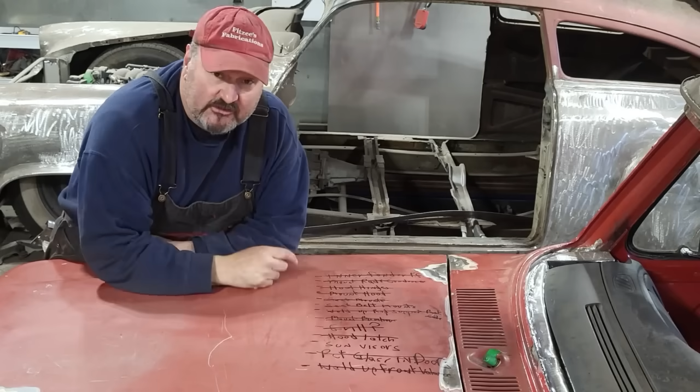Look, the to-do list is complete. Stick around.

Here we go. Project VIC100. Back on it again. I'm going to try to see what I can get done. I'd like to get this here clued up this week. And my little list here, a lot of it is pretty well straightforward and simple. I'm going to start working from the front to the back.

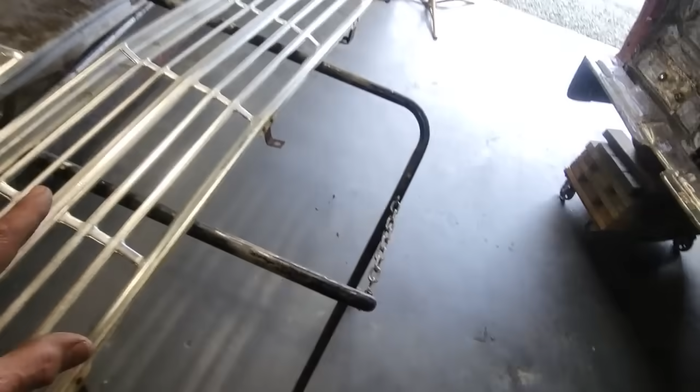I got the grill and the bumper here. I laid the grill up in place. I got to drill 2 holes right here and bolt them on. I'm not going to be concerned about that right now because I had it laid in place. It's all going to work. Everything's fine. There's no clearance issues with the grill that I can find. So I'm going to move on to getting this front bumper mounted.

I got to make up bumper brackets right here to come out, and I got to join into the frame rail here. Now, the problem I got is that this is why I was talking about body mounts and stuff like that. I can't mount them on the inside, and on the bottom I can't mount it because there is a cross member that goes across the bottom there and the rad support right here. So I can't hang off the front of it here anywhere, back to about here somewhere.

So I can only come down, and I got this sway bar to deal with on the bottom. So the bottom is a bit of a nuisance. I'm going to have to come off this side here and go down and go forward. That's what I'm going to have to do for bumper brackets. So I think I'm just going to come down here with steel, and then go forward and give me something for the bumper to mount to.

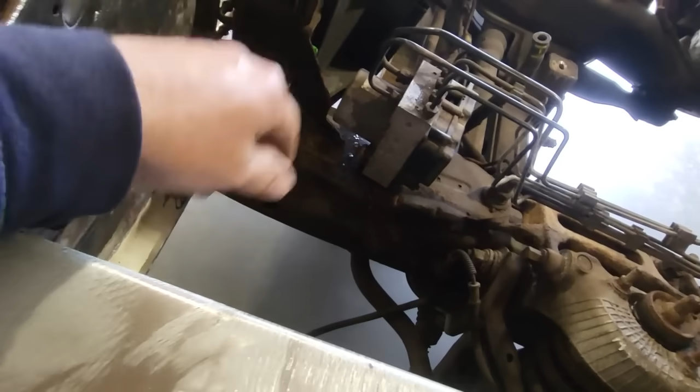I'm always looking for used steel around. I managed to find, I think they're 8-foot lengths possibly. There's a bunch of 2x2 right here that I picked up used. It's all brand new steel. It came from like a building supplies place that came with some brackets or something, and this steel was very clean. I like it.

So I'm going to take that there. I'm going to mount to the bumper. I'm going to double them up and make 4 inches out of them. I haven't got nothing here, and I'm not buying nothing for this. I have it here in the shop, so I'm going to use this here. I'm going to take a piece of that now and start taking some measurements to mount the bumper on the front of it.

And I'm going to build a plating system that will take in the factory bumper bolts right here. I'm just going to get a strip of steel that'll fit in here that this will bolt to. And I'm going to have it wide enough so I can just weld a 2x2 to it. And that'll be welded to the chassis rail. So it's pretty well straightforward and simple. I've been thinking about it all weekend, what way I was going to do it. I'd just as soon get it done.

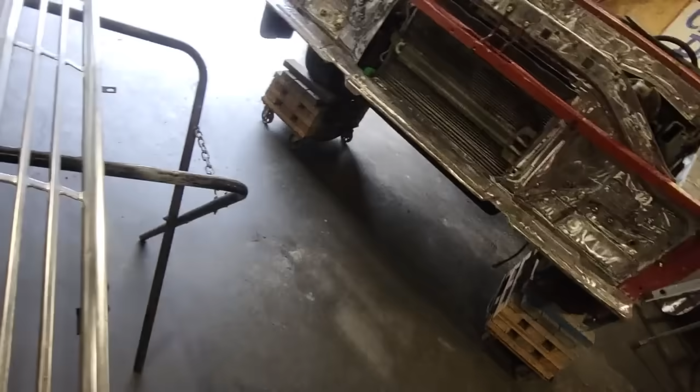And so the bumper, I got to figure out how wide it's going to come out. You can see the way the brace is there now. So the bumper brace is going to come out here somewhere on the outside of this. So I got to take some measurements now and figure out how wide this plating system is going to be, because it's going to bolt on here, but the chassis rail is going to be out about here somewhere. This is what I got to figure out. So I'll go get that all figured out now.

Been doing a lot of figuring out and trying to get a game plan on everything. This is what I've come up with. In here you can see I made this L bracket that's cut on a 45, and that comes out this way here to the front. I made 2 of them, one for this side, one for the other side. They will be welded on there.

I started thinking about individual bumper brackets coming out and tabbing off them, and I think the easiest thing for me to do is just to make a square box that'll go over here like a push bar, and then that'll go back and go over here.

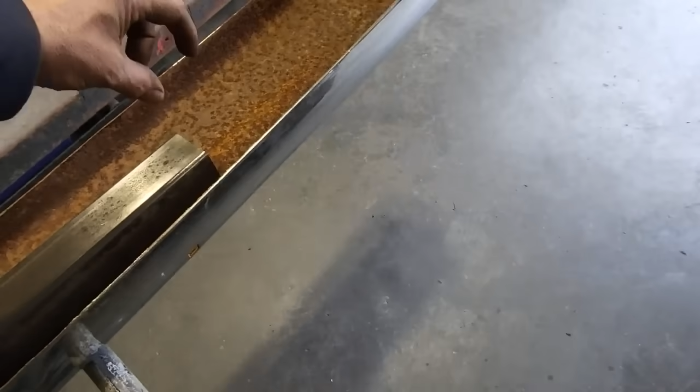That way, because the problem I got is the actual bumper bolts. To give you an example, right here, see there's the bumper bolt there. Well, this is about where this end of the pipe is going to be. This piece right here, this square stock piece, will be about right here somewhere. So I need to put tabs off of it to come over to this here.

Now, if I had this piece going across this way here, I can just weld onto this, come up, and tab to this here, and tab to that bottom there, and then I got spots where I can actually put the bumper on. And this here will go across the front of it like this. It just tidies everything up, keeps everything square. It's extra support, ties the entire front chassis rail together.

And so I just look at the whole point of simplicity of it, keeping everything square, because the frame rails are not exactly square going out to the front of it, but I got a measurement now from this back corner to the back corner on the other side, I got 42.5 inches. And if I just made this a square box, 42.5 inches, then I can move it back and forth to actually figure out my heights.

I'm going to cut, I think, another inch off of these, and that'll be my outside edge, because I don't need all this here. I got to have it so that I can actually tuck the bumper back as far as I can once I get it bolted on. Because once I get it figured out where this is on this, then I got to figure out this stuff here for the bumper bolts, right? So it's a lot to take in, lots of figuring to do.

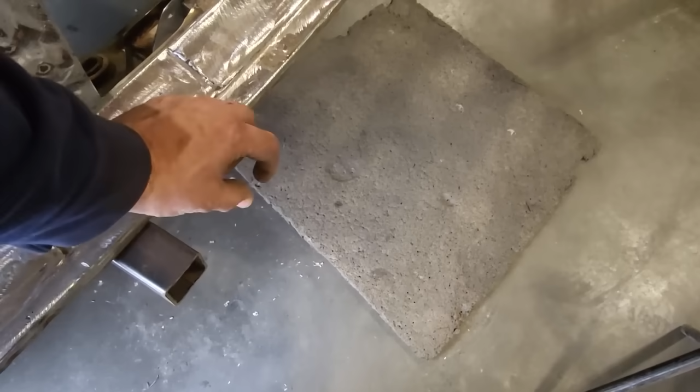Just a regular bumper bracket won't work. Like just tabbing this off of this here and coming down and running tabs off it. Because like I say, the bumper bolts are about right here somewhere. Then I would have to run a big old wide tab off it. And then trying to get this one the right height, trying to get that one the right height. I can do it all over there on the bench. Get this all square and flat, so when I put it up in place, this here will be level and straight. And then I just got to figure out where the tabs go.

So I'm not going to think too far ahead. I'm going to take this off now. I got 42.5 inches. I'm going to cut this on 45, cut this on 45 after I cut an inch off because it is too long. And then I'll take this piece here, cut it on 45, mark it out 42.5 inches. And then weld that onto that. So I just got this great big push bar in front of it then.

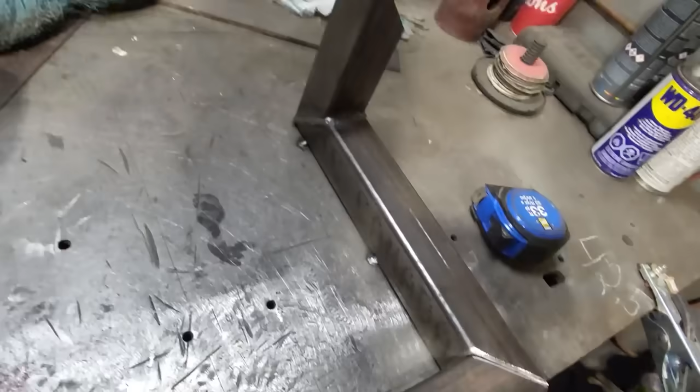I'm just blowing through this. I got everything cut on 45s. I got this measured up now to the outside edge here, 42.5 inches. And I shortened up this end here a small bit on the ends. I cut 2 inches off it because I figured this bar here is going to be out too far anyway. And this here could be moved forward some, so I took 2 full inches out on the inside here and cut that off, and then I cut this on a 45 to be the exact measurement from here to here, which is 42.5.

And then I squared up the bench here. I set them up, welded them on. I use the front of my bench as a straight edge. Then I measured from here to here on the inside edge. Done the same thing from here over to here, and I'm square. So I'm going to go ahead now and weld these on right here where it's 2. That way I'll get that all done.

But you can see the concept of what I'm after here now. I just want this to come down here and across and come up again, and that way I can just run a bumper bracket here and a bumper bracket here, and it'll bolt right on. Simple as that. Everything else I was thinking about, because this is the outside of the frame rail, I couldn't put it on the bottom of the frame rail right here, and I couldn't put it on the inside of the frame rail here.

It had to be on the outside. And in order for me to come over to the bumper bracket, this would have had to come down, come over, tip over, come over, this type of thing on a straight edge, and then trying to get both of them to be symmetrical. I think this here is just as simple and easy. To me, I want to make this quick and easy so that I can actually get everything put together on the front of it.

And this is just a crash bar. At the end of the day, it puts a bit of strength on the front of the truck and ties the nose of the frame rail back together again, because there was a cross member there, welded all together. Now it's all going to be joined again. It's just going to be the bumper bracket is all. Anyway, I'll go get that all welded up.

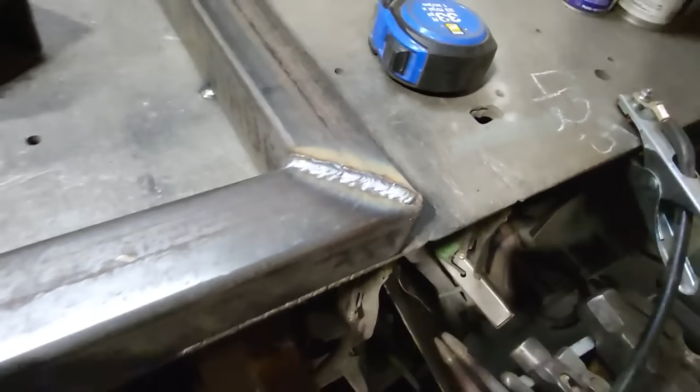I got the welders changed over. The VIC100 got 023 wire in it, and the VIC205 Pro got 035 wire in it. So now I got this machine hooked up here, and I'm just trying to get used to it again. I don't do a lot of heavy structural welding at times, and they're not half bad welds, just they're very high, and I don't like that. And oh, that's good enough for this old thing.

I gotta let this cool off now, cut it off. I just gotta weld the bottoms here and the bottom here, and then this piece here is ready to go over and start test fitting. I got to figure out where it sits in the bumper and go from there. So I got them all welded up and grinded up.

As they always say, if you can never be a good welder, be a good grinder. That's good enough. That's lots of penetration over there. I just didn't like how high the welds were going. If I had time, I should have set the welder up right, but no, that's solid. Now you can see here, there's the bumper bolt there. There's where the outside of the frame rails were, in reference to this.

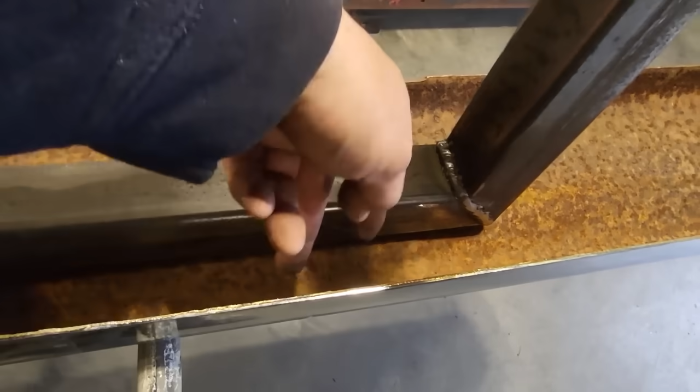All I'm going to do now is make up a tab that'll go down along here. That'll take in that bolt and that bolt there, and that will be welded to this here. And it'll just bolt down. It'll be a tab off there and a tab coming up here. I'm probably just going to make a strip to go right down over the whole works of it and just weld it from both sides. That way I'll have it done.

Same with over here. The only thing I got to find now is where this has got to be in terms of in and out and the height of it and stuff like that. So I'm going to clamp this in place now back on the truck to see where everything lies. Well, you talk about a few hours. I've been all afternoon now playing with this, trying to get this figured out.

I had the original chrome bumper. I was using that, and I found that I had to clamp everything on. I felt like the bumper was twisted or something, so I went and hauled out the steel bumper and started fitting that on there. It seems like that was fitting a little bit better, but I will be putting a chrome one on it. All I'm after is trying to find these locations here where I can actually put the bumper bolt plates on and get them all set up. Trying to figure things out.

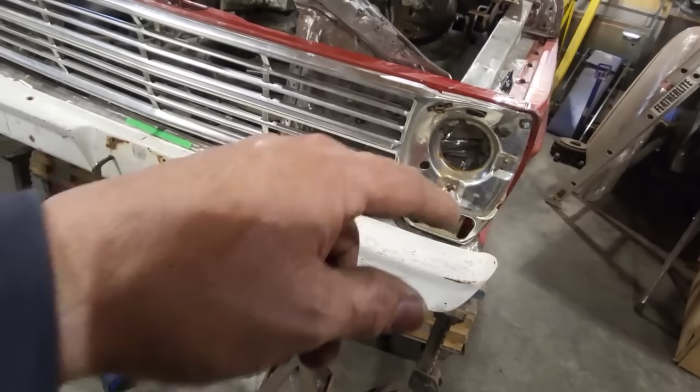I had to put the grill in it to get a visual on everything, to find out the distance here, how close I can tuck the bumper back. I've noticed some that are stuck off and some are right low and stuff like that, but I like to have this level with the bottom of the grill here and have it back as tight as I can get it, just a little small bit of leeway in between here.

It's still not the same left to right, because right here in the middle, the easiest way to describe it, the license plate bracket is curved like this. That's the easiest way to describe that. And I got that square stock running across the front. So when you're trying to clamp to it, whatever side you clamp to first, she'll pull that side in. And then you clamp the other side and it'll just bring it in, but it'll still stick off a small bit. This is what's going on here. Right, still stuck off a small bit here and a small bit there.

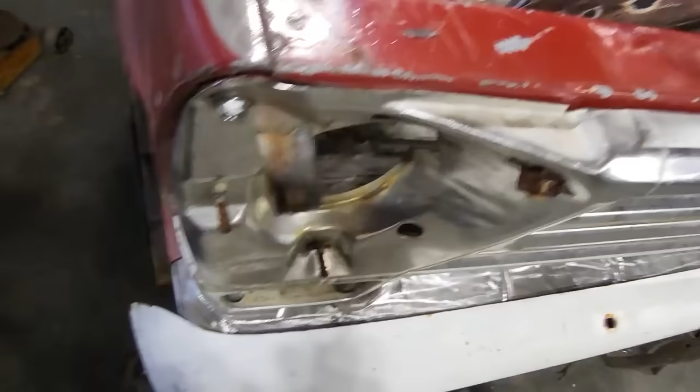Once I get the brackets figured out where they're going to go, I'm going to rig them up so that they're going to pull in tight. And it'll be touching along here on the bumper, and it'll be pulling tight in here. Trying to get the distance here figured out. Then trying to get these to look right. See here now we got this bracket. You see this hole above it? That's symmetrical left and right. It's in the same location.

And I was trying to get this section here to line up on both sides. And for the longest while, I had this one all the way forward, ahead of this line, and on the other side it was behind the line. I couldn't figure out what was going on. And it's because of the twist in the bumper. You're figuring things out as you go along, see? And I got this jury-rigged up enough now that I got an idea of what's going on. And I'm happy where it's to.

And I got this bracket put on the same place on this side over here so I can weld them on. I got spacer blocks put underneath the rad support. Looks like probably a 3/4 inch or ½ inch piece of board. And I got it clamped down with a C-clamp there on both sides. That's what's giving it the height. So when I take the blocks of wood out, there'll be a space underneath the rad support. Yeah, it's tricky, I can tell you.

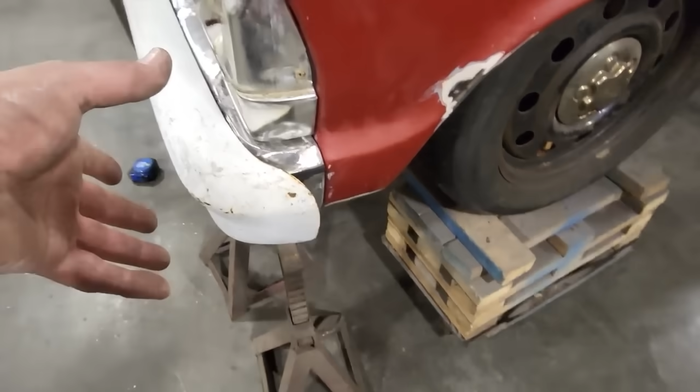I'm beat out at it here now, just trying to figure out, like, I'm still not happy with the way the bumper sits. I'd like to have the bumper turned a little tiny bit more like that. And I think all I'm going to do there is when I put the bracket on here, I'm going to put a spacer on the bottom bolt when I go to weld it on. So when I bolt it all together and weld it in place, right here there'll be a gap on the actual bumper bracket, so that when I take the washer out and tighten it up, it'll turn the bottom of the bumper in. That's the game plan that I got anyway.

Because over here, same thing, right? Just seems like it's not half bad. It's straight up and down. I've seen these bumpers where this section right here has been twisted out this way, right? So that's not half bad there. It's an unusual shaped bumper. Like I talked about before, the bumper gets narrow in the middle and gets wide again. That's just the nature of the beast on these.

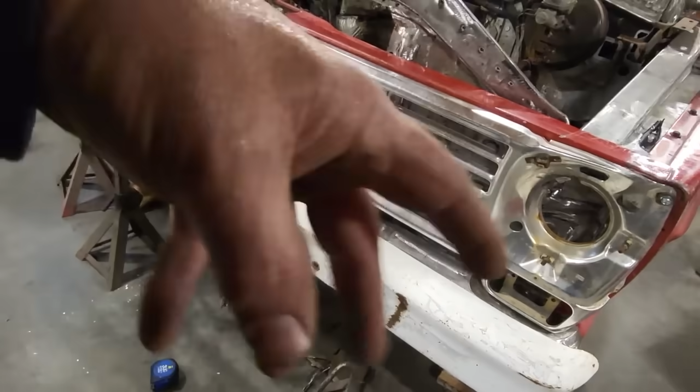And it overlaps the center valance. So I wanted to overlap as much of this line as I possibly could. You can see this line here goes along the front, and then it just disappears. Now that line up here is right here underneath the bumper. That's how much the bumper overlaps on that end and in the middle. It's wild. Like, what was Ford thinking? You would think this would have a bit of a curvature to it. And I've seen guys take bumpers and put curves and everything on them. I'm not going to touch that chrome bumper. That bumper's going on like it is. I'm just over-analyzing every little detail.

Right here, I got a hole. I got to drill. There's a bracket in here. You see the little bracket? Look down there. Yeah, you can see the little bracket right there. You can barely get my finger at it. But I got to drill a hole in the rad support there, and there's another one over here. There's one in the middle right here that I'm possibly going to have to lengthen, because that goes down.

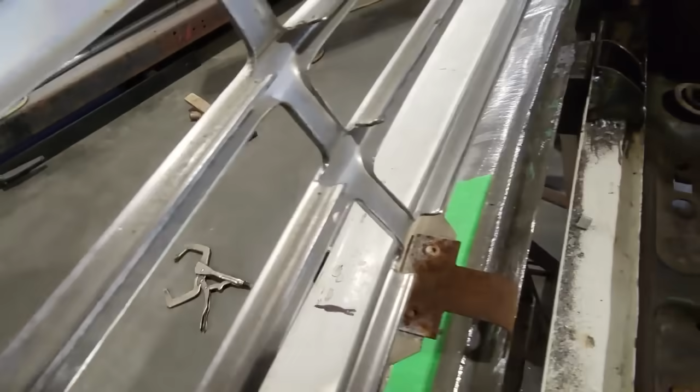You can see it right there. And I think I'm going to lengthen that and have that so it bolts on in the middle right here, in this section right here. This will come in and go down and bolt on here. That's what I think I'm going to do there. And that's all the original brackets on the rad, on the actual grill.

But yeah, I got to figure it out. I got to go make up these brackets here now. Get them figured out, see if I can dig out some 4 bumper bolts. I have a bin of bumper bolts there. It's just a matter of finding nuts and everything for them, find the ones that fit them. So I'll go work on that now and see if I can figure out something for brackets.

I throw nothing out. Oh, carriage bolt style unit. These are the bumper ones here. I found 4 of them there, 4 or 5 of them. There's a few more there. I'd like to have a few long ones if I can get them. Yeah, they're too long, them ones there are. So I'll figure out a few bolts and get some nuts for them.

So here's how the bracket and everything looks on the front of it now. It is all fitting. I haven't got it welded on yet. I'm going to wait till I got the bumper actually mounted. So if I got to tweak it to get the bumper to fit proper, I will.

Over here now, I'm going to use the steel bumper, or the painted bumper. All I'm going to do is I get 2 strips now. They're going to come down here, come up here, and cut 2 holes in them that I can actually put the bolts through, and then I can tighten up the nut on the back side, and then this plate here will be welded right here, onto this here. So this will have a tab coming up here, and a tab going down on the bottom side of it there. That's the whole process.

So over here now, what I got done is I got myself some bolts. Hopefully they're going to be long enough. This is all I can find. I have to run out and get more if I got to. But I got this 3/16 plate here. I'm going to measure up how much I need, cut it off, and then I'm going to start bending it up to fit. I'm going to try to see if I can bend it in the vise.

Hopefully I can, because there's only strips. If not, I'll have to split it and thin it and bend it, and then I'll weld it up again and dress it that way. But I'm going to try to see if I can just manually bend it first, because I got to put a 90 degree on one end of it, and then I got to put a hole in the end of it here and another one down here, so I can actually bolt it on to the bumper itself. So I'll go ahead now and get these cut out and see what I can do about bending them up.

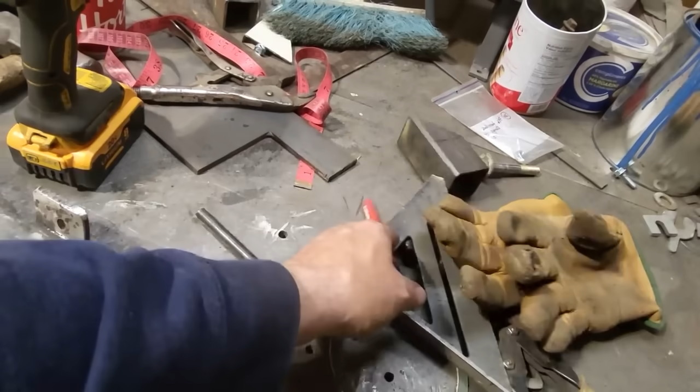Well, that wasn't half bad. This is what I come up with. All I did is I cut up some lengths of that 3/16. I just clamped it in the vise like so, and struck it with a hammer and bent it over. That's it. I went over and test fitted it, marked the back side of it, came over here and just drilled it out with a couple of drill bits. There you go. Got a couple of bumper brackets, rounded off the edges on them a bit. We'll go over now and bolt them on. It's as simple as that.

Got 2 of them bolted on. I'm going to go over now, position this on the front of it and clamp it onto that spot there and get everything lined up where I'm happy with it, so I can get that welded on right there. So I got it all welded on. There we go. We got bumpers on it. I got to take this off now because I only got the bottom lip of it welded, and I got to weld the top of the bracket and everything under. But I went ahead then, came over here and put some bubble gum on over here.

And got that so it's permanently mounted part of the truck. I want to tidy it up and run beads on this when I haul all the front off it. But I'd like to get this bumper bracket finished up because the top of it is kind of tipped back a small bit. So I'm going to have to probably put a small sliver of steel or something in there to weld it up to keep it in the position that it's in now. But that's it. She has a bumper.

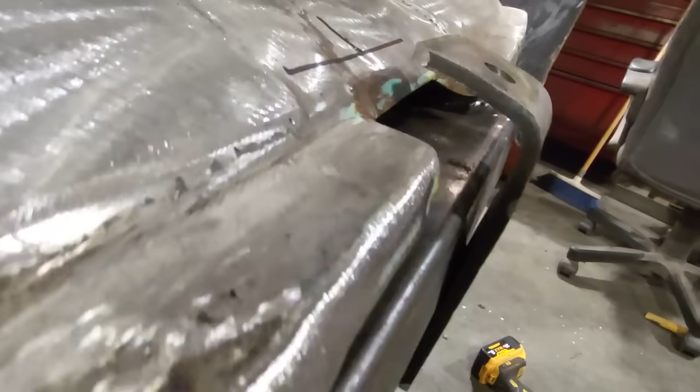So I'm going to go ahead now and haul that bumper off so you can see how it all goes together. So here's what it looks like. There's a bit of an angle there, you can see. I'm gonna have to fill that up with something. Over here, the same thing. I don't want to disturb them there, so I'm gonna weld them up now like they are. I'll probably get something put in here later on.

This was a nightmare. I had to cannibalize an old wrench in order to get this bolt out. I marked these here because I want to see how much of this I can actually move back to make room, but that's not the problem. The problem is this section right here. I might notch this or something so I can get in there. It is hard to get a bolt in here, the way that's done. But that's it. I got it done.

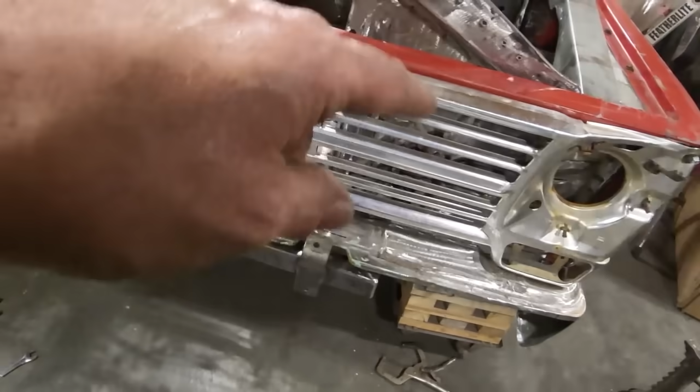I'm going to go ahead and get 2 of them welded up. Well, I got most of it welded up. Sides there. Got them all welded up now. I'm going to weld the inside in there when I get the rad support and everything out of it. Same with in around there, the back side. I'm happy with everything that's there now. So I'm just going to throw the chrome bumper on there and see what it looks like.

Well, there is a slight difference with them. All I got done is the 2 bottom bolts put in. I just got the 2 top ones laid in place, so it's got to be pulled down a small bit and tightened up over here. But there is a bit of a difference right here from the other bumper. You see it here and here. This is what I was after, this distance here.

This side here seems to be tweaked out a small bit. You can see there's a kink in the bumper there. So I'll have to massage that back into place on that end because it only hangs from here. So this side has to be pulled in. I'd say if you give that a few smacks with a block of wood and a hammer, you'll get that moved back. But yeah, I got the bling on her now. Look, all the chrome on the front of her. Woo-hoo. She's coming together. That's another one off the list.

I got to finish up some welding on it, but I'm going to leave that alone. I'm going to consider the actual bumper mounted. I just got to finish it up. I had to put the headlight pods on it just to get the full effect of it. Yeah. Another piece of the puzzle done. Now, a buddy of mine called me today. He's going to pop out tomorrow, and we're going to work on getting this hood put on. And that'll be all the front buttoned up then.

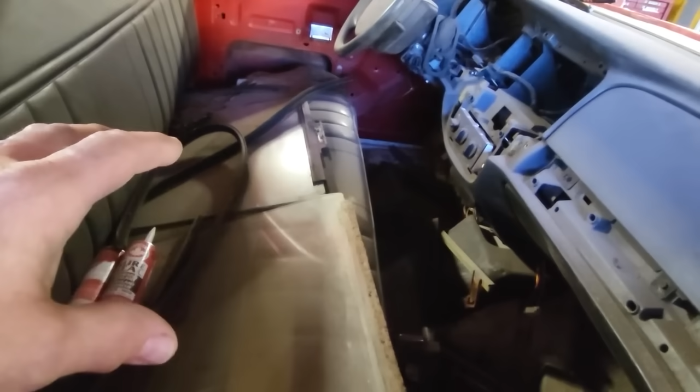What I'm going to move on to now is I got to do all the interior stuff. But before I do the interior stuff, I got to look after all this glass. Put all this back in the door and get all this back to normal again. And some of these doors, the bottom of the glass needs work done on them. I need to make up new runners or whatever for them. So what I'm going to do here now is take all this stuff out and set it up and start doing repairs so I can put this door back together.

So here's what we got. This is the mess I'm up against here. I got this piece here, this channel, and it is literally gone. This fits over the sleeve here, which slides over onto that there. What I need to do is make this piece here to replace this piece. I have this one here to go by. So I'm going to use this one as my template, because this will be the mirror image of this one. So all my measurements from this end will go from this end here, and so on. I need to do that repair there.

Up here I got the vent window section. This has a pin right here that welds onto here. That used to be the adjusting part of it and it's let go. So I got to weld that on. I may have to pull the glass out of this here in order to do that repair. But for now, I'm going to concentrate on getting this door glass done, because the vent window on the passenger side is good. So I can actually do this one here and put it together.

It's kind of strange because this window is good, but that vent window belongs to this window. And the vent window that belongs to this window is perfect. So I'm going to go ahead now and dream up something for this. I have an idea, old scrap steel I got here, that could possibly fix this. If you remember all that white sheeting that I had, there was rolled edges on it.

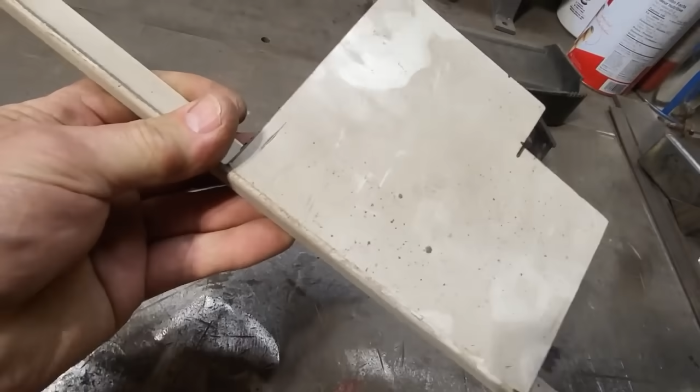The problem I'm having is finding a complete section that I can get both sides of this channel out of. I'm going to measure it up to see if it'll work or not, because I do have an abundance of this here that I can possibly build with. I don't think I got any there that's the full length. I'd like to use this wide section here. That one's too narrow. This one here I have roughly about this much of, and this much of this one here. So I might be able to make one from them two pieces here.

I can simply just take a piece like this and weld an edge back on it again. But I'm trying to make this so that I can actually build it and not have to worry about sides, because I think this here should work. So I'm going to go now and see what I can clean up here, see if I can get a measurement of how much I actually need, and start making the piece. Well, I did some more digging and I found this piece.

So this here should do for what I need it for. The measurement here almost seems identical on the bottom side here as the width that I need. This is the width that I need here, and that there seems pretty well to be the same as that. I kind of looked into this. If you look at the two of them there, seems to be quite the same. So I'm going to measure it off as 18 inches. I'm going to cut it off, trim it off, and start figuring out how I'm going to attach it.

So here's what I come up with. Nothing fancy about that. I had to close it up a small bit. I cleaned up the actual runner and I clamped it in place. Came over here using this one here as a guide, because it got to be backwards. But what I've noticed is that this is in the center of the actual thing. So this actual piece would fit on the left or the right. It doesn't matter. You just got to flip it around.

Like if you wanted to take this glass here, if you only had a passenger side door glass, all you got to do is pop this off, turn it around, put it back on the window again. You got driver's side door glass. That's the way they work. It's pretty neat. But I got this set up here now. This was only welded on, a couple of spot welds across here and a couple of spot welds across here. So I'm going to repeat the process, but I'm just going to weld it on the side here.

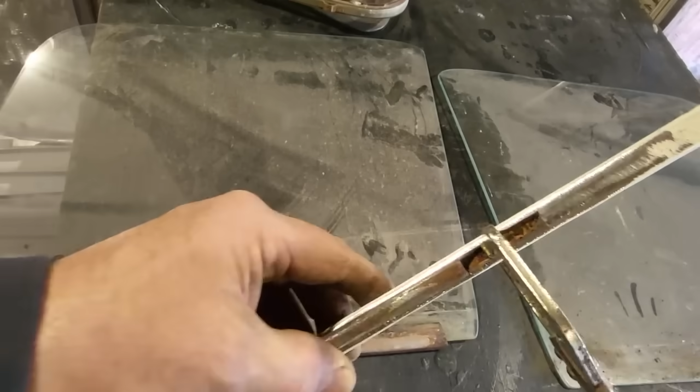It's off-centered a small bit. It's not right in the middle of the actual channel. And I just duplicated. I just used this one here, like I said. You can see the way that one there is not fully centered on it, on either end. So I just duplicated that and made sure that it's to the back side of the guide side. So you can see the way I got it done there. So I got that set up. Yes, this side here got to go back a bit more. I'll get that done now, get that welded up.

Now this is all I got done with it. Just a few tacks. I put a couple in the middle, and I shouldn't have been at that because it will interfere in here if I don't watch it. But I just checked it. It seems fine. But only tack welded on the outside. All this was like 3 little spot welds out here and 3 little spot welds out here.

So I didn't want to go trying to drill out holes and try to weld inside the channel. So I just tack welded it on the outside edge. That'll be strong enough, I'd say. If it breaks off, I'll repair it again. That's all. So that's pretty well ready to go. Now I got to figure out a way of getting all this together.

Back on that window. Oh, I got it on there. It was tight going on and it was tricky, and hopefully it's going to stay in best kind. I'll deal with it if I run into troubles later on with it. I'm going to turn around now and start putting this one here back together. I'm probably going to work on this first to get all the glass modifications done.

I never put no urethane or nothing on it. This here was never held on with urethane. It was just pressed on. And what I did is I folded in the top edge here tighter on the edge, so it was hard to get on. You can see the way I closed it in on the bottom.

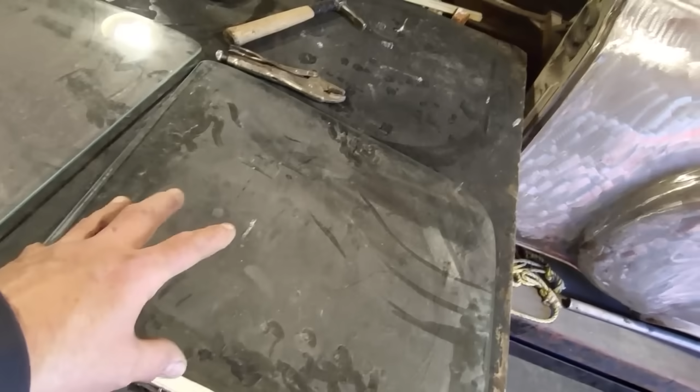Okay. And then I just turned around and was very gentle with a pair of vice grips, squeezing that together. I figured I was going to bring you back and this would be just a scattered mess on the bench. But no, I got it on there, so I'll clean this up in here a little bit more now, and I'm going to fill that full of grease. And that one's done. And this one here, I'll just clean it up and put a little bit of grease on that one there as well.

I might even go to the point of giving these a lick of paint. I don't need to worry about that right now. Let's take this one apart and see what I got. Watch your fingers. Yeah. She's there.

I got it on, and I got it lined up. My old buddy Jeff showed up here and we had a gab session, and he gave me a hand putting this on, getting everything lined up. I had to do some adjustments on everything, but I never had to modify nothing down here. I loosened up all the bolts, just moved it around where it wanted to go, tightened it up. I got the spring put back on this side here. It helps with lifting the hood up. It is an extremely heavy hood.

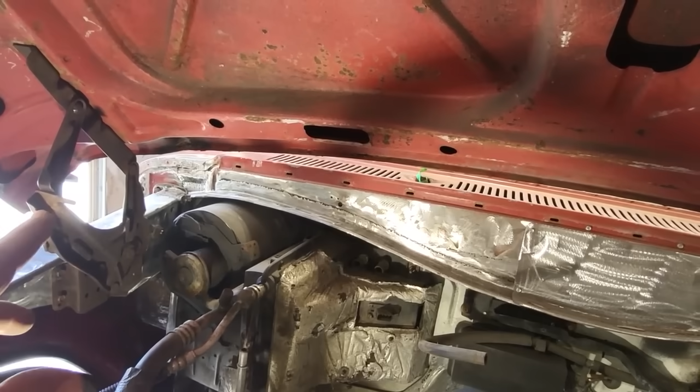I don't know if the push rods are going to work. I'm going to sit on it for a while. This is going to be what she's going to have, a rod of some sort for now. I may play around with that, trying to see if I can get a spring back in it. I'm not worried about it right now because it's something that I got to really think about. It's only on the hinge itself, so I can take it off and modify it, or I can get another hinge like it if I come across it. I can modify another hinge and bolt it on.

But for now, everything opens and closes. I got the latches working. I had to do some alignment on everything. I had the grill put in it last night, and I noticed that these little holes right here, they're alignment holes for the grill. They weren't lining up. The grill had to be pushed over this way. And I was having problems. When I bolted the hood on it today, I figured out what it was, is that the front of the car was over this way too much.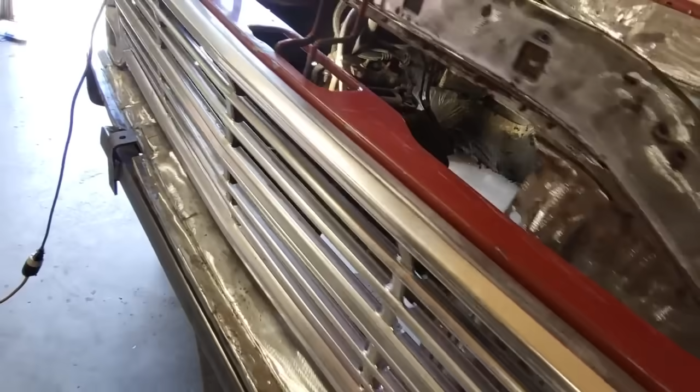And down here, the actual bolts where I bolt the rad support on, these ones down here. What I ended up doing is oblonging the hole in the front of the rad support and just shifting it over a small bit. And by shifting it over a small bit, the fenders lined up nicer. And then the grill, when I bolted that in, went in place where it's supposed to be. So I just threw the grill in it to make sure everything's lining up. But the hood all fits.

There's some sort of stop mechanism out here. I think it bolts on here. I don't know. I got to figure out what it is that keeps the hood up, because if there's nothing here, the hood falls right to the bottom. It was tricky putting the hood on. I tried laying the hood on, crawling in here, and then trying to put the bolts in out here. Couldn't happen. We had to lift the hood up and hold it in place and then get the bolts started. But it all worked out.

And it opens and closes good. The latch was seized, strangely enough. I had to get that unseized, but that works perfect. Everything opens and closes good. All this down here, I had to adjust down in order to get the latch right on it. This is the safety catch for when it's unlatched. But yeah, so we got another thing done. The hood fits, it bolts on.

I'm going to have to use a rod on it for now until I figure something out. I'm not going to be concerned about it right now because that's not going to stop me from finishing this truck off. That's like a winter thing. I'll iron that out and figure out some sort of hinge, spring for that. I'm not even going to bother with the rods on this now because I don't think they're going to hold up that hood. That hood weighs a ton.

And you know, it's just one of those things. I'm going to figure out some way possibly to put the spring back on it. We've talked about it. A few people pointed out moving the hinge. Maybe I'll do that, I don't know. We'll cross that bridge. But for now, she's going to get herself a nice broom handle pole and the other spring to help it. I find it a lot easier to open with at least one spring on it, and it doesn't interfere with nothing.

And it just closes nicely. That's it. It's closed. That's latched. Now I got one complaint, okay? This is a right-handed truck, and I don't like it. I'm a left-handed type of guy. I got to see if I can find a left-handed pickup truck, because the only way to open up this truck is with the right hand.

And then that just opens, simple as that. But yeah, I thought that was funny, because most times you open hoods, you go in here and you grab stuff to open, being left-handed is normal, but this one's weird. You got to go with the right hand to open. It opens and closes nice. Seams are good all the way around it. Another thing done. So that's another piece of the puzzle.

All the front is done. I got all the alignments done on everything. It's only minor stuff got to be straightened away on it. A decent gap across the back here, and going all the way down here. Like I said, I got these pieces put here. I got to figure out some sort of stop mechanism. Not going to worry about it. If I got to put a screw on a piece of rubber or something right here, I will. That's all I'll do with it. Just keep the back of the hood up. Anyway, that's it for that.

Anyway, I want to send a special thank you out for Jeff. He's dropping by here today to give me a hand with this. He's an old buddy of mine. We go way back.

So I'm going to move on now and start getting all the stuff glued up on the inside of the truck. Oh, yes, over here. Is upside down. Mount hood. Here we go. Another thing off the list. Get back at them windows and everything here now. I was in the middle of that when he showed up, so I put them off.

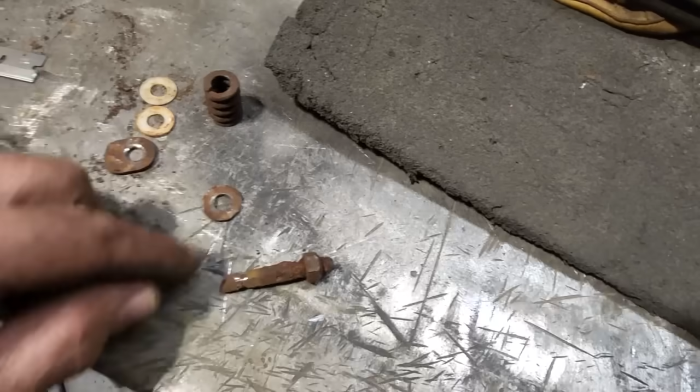As you can see, I got this one done. I got this one all fitted on there now, and it fits pretty good. Very pleased with it. It went on snug. So that's done. I managed to get it all apart. This is the actual stud itself. There's the spring that was on it. There's a washer. There was a sleeve on this here; I never bothered with it. And then it's the upper section here that keeps it from opening too far. There's a section of that missing. I think there's supposed to be a pin or clip in it. And then there's these plastic washers.

I want to simplify this because I just wanted to have it so it swung and it closed. It was a bit tricky. What I ended up doing is I welded on a 5/16 bolt. I just cut it off and then tack welded it on. Now this can be tricky. I was trying to clamp this in here. You can see the way I got it clamped into the vise to try to remove this so I can weld it easier. But no, I couldn't get the glass off it. Didn't want to break it. If I was going to break it, I would have broke it when I welded it.

And all I did is I put a tack, cooled it all off, put a tack, let it cool all off, put another tack, cooled it all with compressed air. That's all I did. Just took my time with it and made sure I got it nice and solid. It's just a regular 5/16 nut. All this is going to do is pull it tight. It's not going to be exactly the way it was originally, but it's going to keep it centered and it's going to be able to rotate from side to side.

I just got to make sure that I put something on the end of it so that the actual nut itself, which I got here, the new nut, does not back off. I'll be putting washers and that on it with this thing here on the end of it like that. I'll probably put a lock washer on it. And I might even just tap it with a bit of welding yet.

I don't know. Just to keep this here from backing off, because there's usually like a lock nut on a type thing like this one here. But I'm just putting it together as simple as I can do it. But then I grinded it all up as best I could, and hopefully that'll hold it. Nothing elaborate here. I just want to get that welded on. That I didn't think it was going to save.

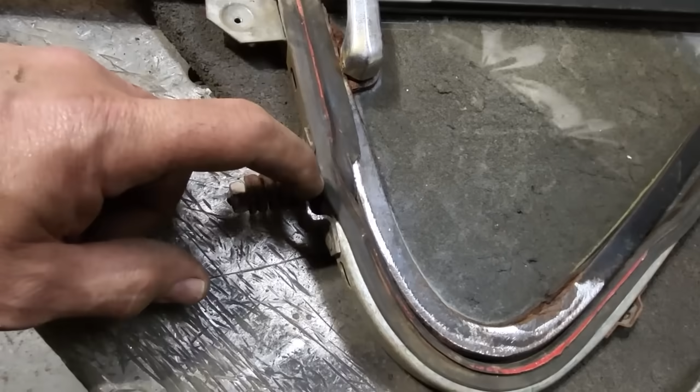So I got it all put back together again the way it was. There's supposed to be like a locking mechanism to keep this from, I think, pulling up again. It doesn't work the way it originally was because there's some pieces that I never even put back in it. This here is supposed to be like a little keyway piece. And you can see there's a collar on this here that this used to slide down over, and I think it used to keep it from pulling down the window too much so that it bottoms out.

All I did was I played around with it enough that I can tighten it up, and I opened and closed the vent window, and I liked it. I tightened it up too much and pulled it down, didn't like it, so I loosened it up again, and then I just put a little dab of welding on top of it. That's it. It works perfect, works the way it's supposed to, and that's just a quick little fix for them old vent windows. It's not ideal, but it will work, and it's all screwed back together again.

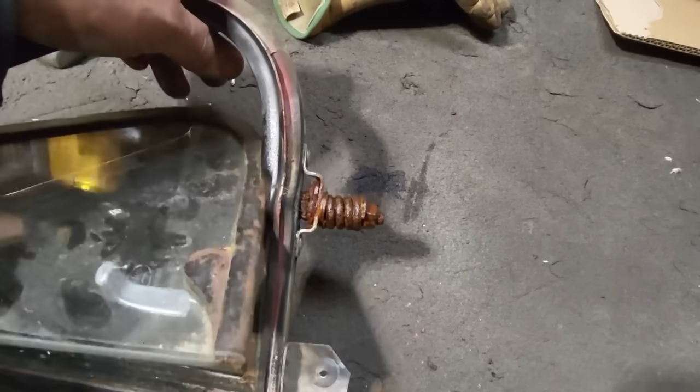So now this is ready to install, and I got both repairs done on both glass, so now I can put the two doors together. Figured I'd give them a quick clean up and put some paint on them to protect them for however long. So I went over and took the other vent window out, figured I'd grease that up and get that all working, and I ended up breaking that one off. Look, nothing's moving. Oh my, so I gotta repair this one now as well.

So I'm gonna do the same process as I did with the other one, and hopefully I don't kill this window. So I got the second one fixed, same process, just welded the end of the nut on the end of it. There's adjustment nuts on the bottom of these here. They were adjusted all the way in and the doors work good, but I'm going to free them up because this is liable to need adjustment now since I got it all taken apart. So I got them all greased up, and I'm going to let them sit for a bit so I can work them loose and get them all freed up.

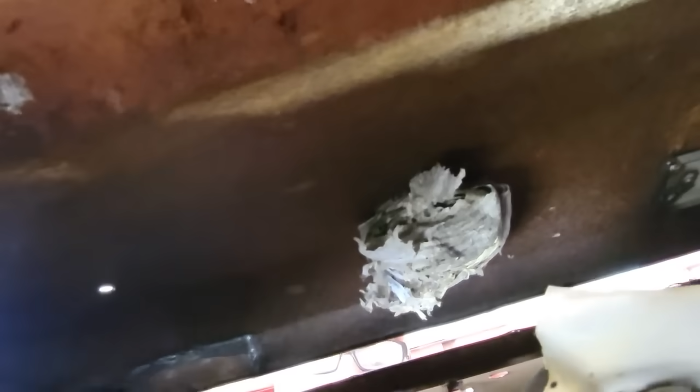I'm over here in the door sizing up the regulator. I want to clean that up a bit, put some grease on it, run it through the motions. There's very little or nothing on that in the way of grease, so look at that. But I was looking inside the door, sizing up latches and stuff like that, and I glanced in over the top here, and I saw this thing. I was like, what, an old wasp nest in the door. Yeah. I don't know if you can see that or not. Yep, old wasp nest.

And that's one side back together. I'm just flying through this, just trying to get stuff done. Basically, it's the same process reversed as what I did before. Glass got to go in first. The last time, I took it out through the bottom of the door, so I couldn't put it in that time. It had to go in from the top, the way it was supposed to.

You put that in, you drop that down inside the door. You get this in position, and then what you end up doing is you put your seal in, and then you start bringing your glass up and you put your regulator in. And your regulator will fit in between this and the actual body of the door. And when you slide it in, you don't bolt it up until you put it on the track, and then you start maneuvering the crank and the window.

It's a bit tricky because the window wants to keep falling all the way down, and I used to be taping it up, and then I figured out a little trick. I used a block of wood underneath the glass to hold it up, and then I put it all together. But I got that side done.

I went ahead and I threw some paint down in here and up inside here, everywhere where the rubber was going to sit along here. So that way I haven't got to worry about it being bare metal up there. All this got to be primed and everything, and bodywork or whatever. But I want to get something on it so I can get it all put together. Anyway, I'm going to go ahead and just blow through the other side and get the other side done as well.

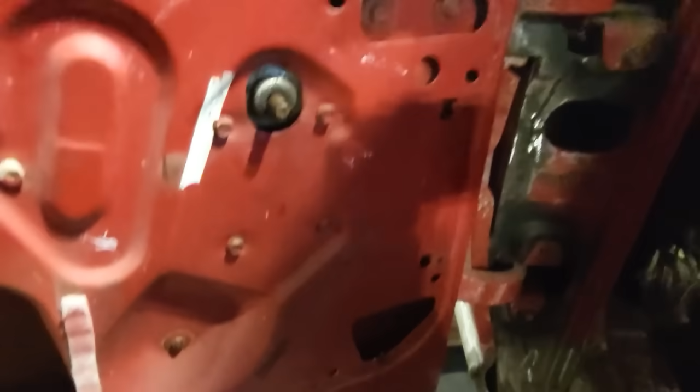And there's door number 2 complete. All back together again. Got all the glass and everything back in it, vent windows. It was just straightforward and simple. Just had to bolt it all in. There's 4 bolts here, 1 bolt there, screw there, and 3 screws up along here. And that's the extent of that. Put a few seals and everything back on them. Another hobble done. Hope that you can read upside down.

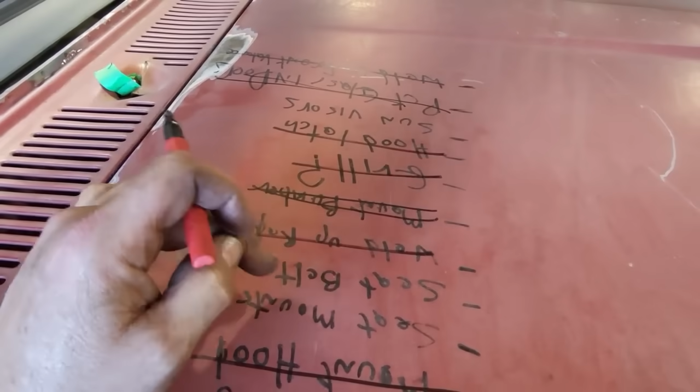That's it. Sun visors. And what else? Seatbelt bolts and seat mounts. That's it. So we're inside the cab now. Everything got to finish up on that. I think tomorrow I'm going to carry on and mount the front seat and have that done and over with, so then I can figure out what way the seat belts are going to mount in the middle, and the sun visors, where they're going to go when I'm sat behind the wheel. Yeah, another one done.

Well, it's a new day. Everything on the outside of the truck is now completed, fabrication wise. I gotta mount the seat, I gotta put seat belts in it, and I gotta put sun visors in and figure out where they gotta go so I can drill a hole. So when I fill that, I haven't got to worry about it later.

I'm over here now figuring out what way I'm going to mount the seat, if I'm going to solid mount it or if I'm going to put it on runners. I'm of two minds. I don't know what to do right yet. So I think I got to size it all up. I got to center up the seat. I have it at the height that I want it. This is where I want the seat. I just got blocks of wood laid underneath it.

These are the original holes. I'm looking to take these in. Plus I want to take the holes in down the bottom of the seat. I got to see where the two are in reference to each other, because I like to have it so that it bolts onto the seat and it bolts onto the floor in original places. Now I do have 4 holes over here, but I'm only going to use the 2 outside ones here and the 2 outside ones over there.

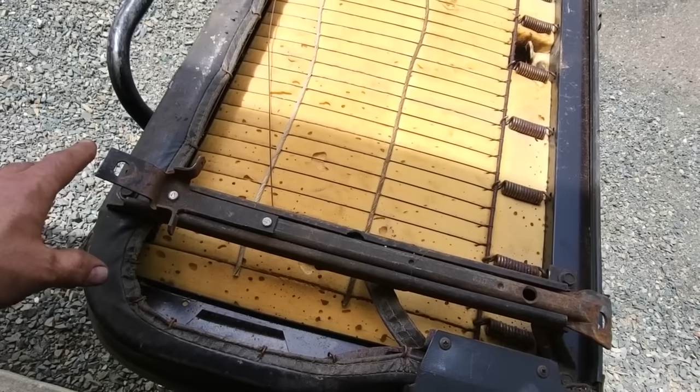So I'm going to sit down now and maneuver this seat around, get it from side to side where I'm happy with it, and start taking some measurements and see what I can come up with. So after taking the seats out now, I got the runners here, I got springs taken off, and I got to move it all the way ahead so that the seat can come, well, all the way back is what it is.

So that way I can move the seat forward if I want to. I like to rig this up so if Wendy wants to drive it, she can drive it. If she wants to move the seat ahead, she can. I have both of them. These are the original ones, belong to the actual square body seat, and I got them bolted on. In here now, I got the mounting section here, right here and here.

And what my plan is now, I want a piece of angle iron that I can just run down here, longer piece. I'll trim it off after the fact, but I want to have lots of excess there. So here's what I come up with. I haven't got no angle iron, but I have an abundance of this here light wall square stock.

I'm going to cut this out here now. I'm going to cut it off to length. I'll give myself 24 inches, and I'm going to split 2 sides of it down, and that'll give me 2 pieces of angle iron. I'll trim it up and dress it up after the fact. But main thing is now I want to get it all built first and get it all mounted, because I got to have this here so it bolts down. I want 2 pedestals to come up here.

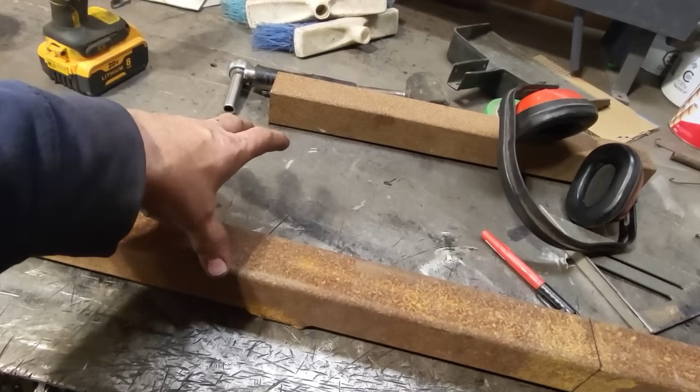Now some people might just say just have mounts right here and mount right here. I'd just as soon all this be one big large unit that mounts on the side of the seat, because it's going to be raised up probably 4 inches or so off the top of this here, and I want to have it so that it's strong, and by keeping it all one piece like this going around, when I put it on the floor I can actually give it lots of strength.

So I'm going to go ahead now. I got it marked out here, 24 inches. I'm going to cut that off there, and I'm going to split this down the middle here and down the other side, and I'll have 2 sections. And here I got it cut off, and I got 2 pieces made out of it now. This is not overkill in terms of heavier steel. I got to clean that one up a bit to get that out of the way.

But what I got to do now is split this here, get it laying flat in the vehicle and get 2 holes drilled. Get 1 left and 1 right made up. I'm going to do it in such a way that when you're looking from the side, the bolt will be on this side here. Instead of having it like this where you can see the bolt, I'm going to have it so that when you bolt it in, the bolt will be on the inside. And if I want to close this in with sheet metal, I can do it if it's noticeable. I'm not concerned about it.

But what I got to do next now is split this here and get it to lay flat on the actual 2 mounting areas. Now when you lay it in here, you can see back here there's the rear bolt. I got a little bit of excess here. I got too much up front. I only need about that much, up to there. But this here is not laying flat. There you can see that. And then back here is not laying flat.

So all I'm going to do is figure out where I'm going to put it. I'm going to split it up here and bend it so it lays flat here. And then I'll do the same thing, I'll cut it here and lay flat there. And then I'll weld up this section here and this section here so that it lays flat. And I'll make one for this side and one for the other side. Just split that there. It's laying flat there. I split that there. It's laying flat there. I'll go over now and I'll weld up 2 of these.

Now, there's nothing pretty about this. I'm not concerned about it looking nice right now. I'm going to trim all this up and weld all this up and grind all this up after the fact.

All I want now is function, because I may run into problems and realize, no, this is not going to work, scrap it. So when I build stuff like this here, I just roughly build it. I give myself too much of everything. I turned around, went over, marked it, drilled the holes on the back and the front, went over, test fit them in the back stud.

Then if you remember when I scrapped the first Crown Vic, I hung on to everything, all the nuts and bolts. And I just went out and grabbed the bucket and dug out 2 front bolts and 2 rear nuts that I can actually bolt this down. So I can actually go over now and mount these in the truck and bolt them down. So I got them bolted in place. They're crude looking, but they're going to serve the purpose. Got the other one bolted on over there.

I got my blocks of wood left here. Out here now, I'm sizing up how I'm going to mount this. Right here, you can see this angle's back. I want to make this flat, and I want to put this on a 90 this way here. I'm going to do this way here. That way I got vertical surfaces and flat surfaces to actually weld to, because I think I'm just going to run a pedestal off of that, and probably a pedestal off the front of this here to mount to the actual lower brackets.

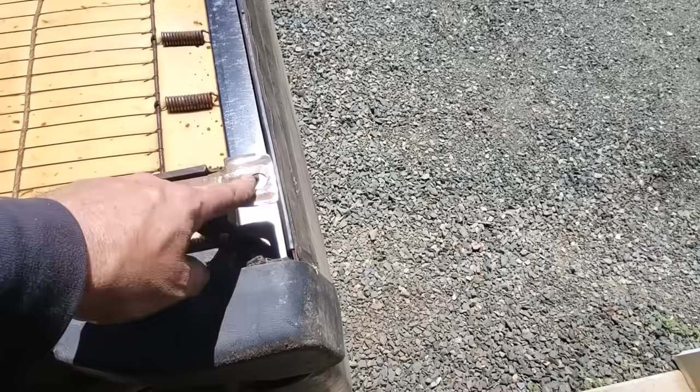So now that I got that all done, that's all straightened away, I'm going to bring it back in here, leave my blocks of wood here, and set this up here and just see where everything falls. So I got the seat laid in place, and I got the block of wood mounted underneath it here, and I got some strapping put on the back side here to raise up the back a small bit because the seat was hitting the hump there. I got in it, I sat in it to see what it felt like, and I'm happy where the seat and everything is to.

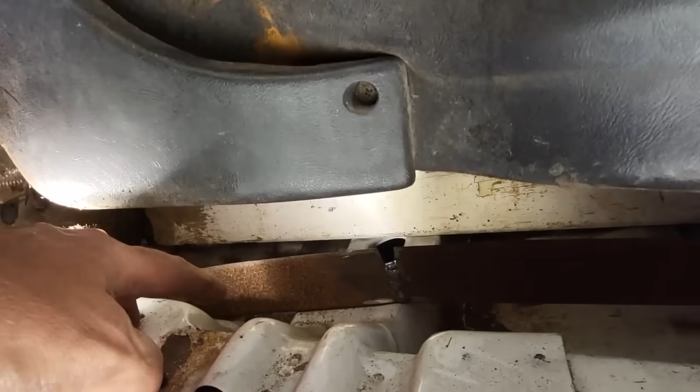It's pretty straightforward what I got to do here. You see the front mount right here comes down, just got to get a piece of square stock to go up to there. The back one, same thing. I'll get a piece of square stock to go from this mount here down to the back piece. That's the reason why I left it long, because the bolt for here is right here, and the bolt for here is up in the head of this one. So this will have to come forward like this now, and I'll dress the end of it. I'll cut off what I don't need, and I'll round the edge off it like that.

And I'll just go dig up some square stock now that I can actually just run up here and weld on here and weld on here. Then I can unbolt this and weld up them brackets fully. It's pretty straightforward and simple. I sat behind the wheel a bit. I'm happy where it's to. It's a bit snug between the steering wheel and me, but I wouldn't say snug, it's comfortable.

And I'm more concerned about getting lumbar support here and being able to stretch my legs out, and I can stretch my legs out. I'm set high in the truck a bit. I could possibly lower it down a bit if I wanted to, but I don't know, I'm quite content with that there. It's flush to the back window right here, just a little tiny bit. By the time rubber and everything goes on it, I won't be up in the back window. So I'll be sitting high, and I love sitting low in a vehicle, but the problem I got, when you start sitting lower, you lose the lumbar support here.

And I'm getting old. I find that if I haven't got support here underneath my legs, it's murder to drive. So I'm going to build this for comfort for me, for driving it. And this is set up now. The seat can come forward if need be, if I wanted to. I don't think it's got to come ahead much. It may come ahead a couple of clicks or something for when you want to drive it.

The pedals are also telescopic in this one, so they come back. So it can be set up easy enough for her to drive it. But anyway, I'm going to go dig up some steel now, see if I can find some pieces that I can actually make 4 little stands for this, that I can get welded in place.

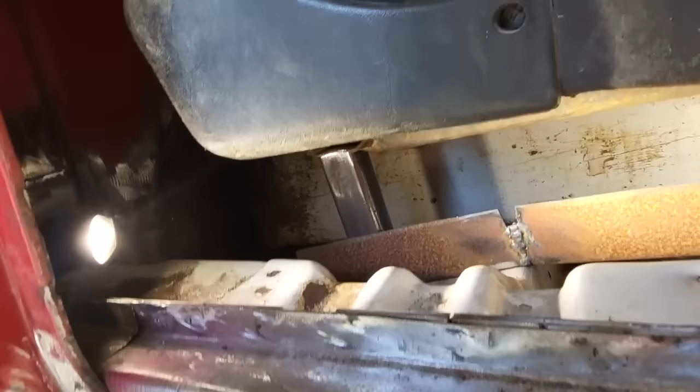I'm just going to weld them on there. I'll dress it all up and figure out something to do up here. Not fussy on where this just cuts off like this. I might cut it back on an angle like this or something. I was going to put it behind it, but it interferes with this bracket and doesn't fit in there nice. And besides that, the bolt is way up here, and I'm trying to get some beef on the front of the plate, where it bolts down. So I'd just as soon have it forward of it.

So I'm going to go ahead now, get that clamped in place, get the other side done as well, and get that welded in. I went ahead and tack welded everything together there. It's close quarters, but I got enough welded on it now that I can haul the seat out and take the brackets off the bottom of the rear end. And I can actually weld them all up solid and dress them all up.

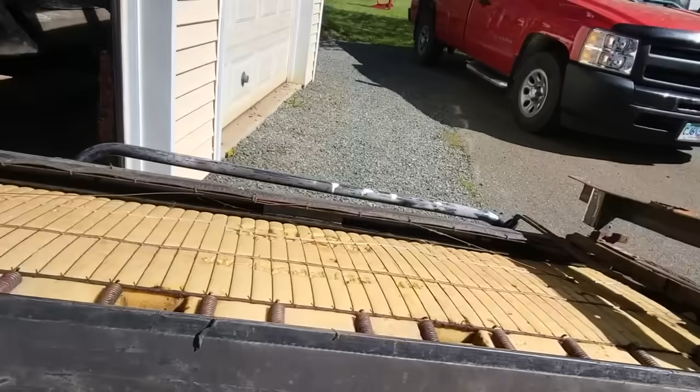Doesn't that look lovely? Look. But that's it. Look at the bubble gum welding there. I was welding overhead there, inside out. Look at the mess of that. Ugh. Yeah, ain't that lovely? Look at that. That's far from rolled nickels, that is. Anyway, I'll tidy that up. Just awkward there because I was in on the back side trying to weld upwards, and it just was what it was. I'll clean it up and weld it up better than that.

Yeah, so I'll cut off most of this now up front. I'll cut all this off in the back. I'll clean this off, dress it all up, and get it all welded up on the inside and all that type of stuff. So I'll pop them off now, bring them over on the bench, and I can weld away at them.

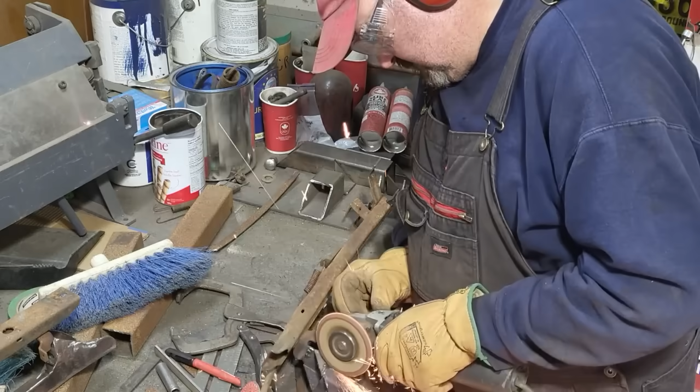And there you have it, all finished up. I never got too carried away with it. I cleaned it all up with the 24 grit and just knocked the head off the actual welds. I chopped everything off that I didn't need. I even cut her back here. This was pretty wide up along here, and I just thinned it out along there.

This is the side that's facing out, and you can see the original height was there. I just cut it on 45, and then I rounded off the corners just to give it a little bit of style. Here in the front end, you can see I just cut it off, rounded it off here for the bolt hole. I'm not going to bother doing nothing with that. That's where I'll store my McDonald's fries when they fall off the seat.

I'm not going to fool around welding anything over that. It's just more work. It's just cosmetic. But I welded everything solid. This is the tab here from the original one that's fully welded on. There's the tab there, fully welded on.

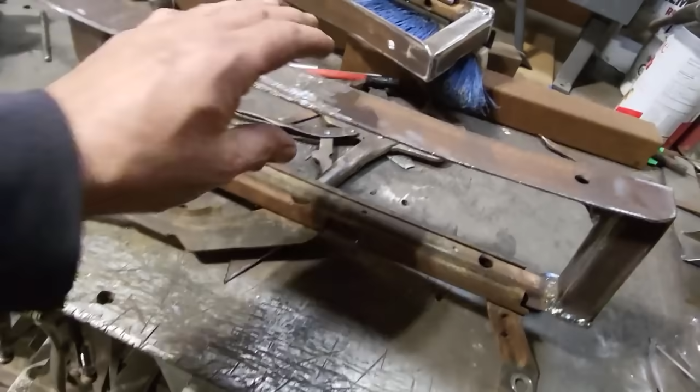Is this the one? Yeah, I ground off all the welds there. That was a bubblegum mess, and I re-welded it again. Not much better, but it's best kind. But I got 2 of them done now. So I can actually say that the actual seat mounts are done. I might bolt them back on and bolt the seat in and just see what it's like.

There you have it. Simple little seat mount. Nothing fancy. It's still functional. I haven't got any of the springs or anything put back on right now because I want to paint all this up, but I had to put this in here because I've got to figure out the center seat belts. So I've got to figure out how high, if I've got to build a platform or something in there for the seat belt to mount to.

But yep, that's the seat in there. It flips ahead. See behind it, not a lot of room. See right here the seat belt goes down through, and I've got to find some way to attach it down there. I don't think they're long enough. I was out looking in the spare Crown Vic, even the back seat belts. I was hoping to get something about a foot long, but they're not that long. But yeah, there's the seat there. I'm gonna crawl up in there now and see what it's like.

Well, as you can see, I'm sat in here. I'm comfortable. I am high in it. I always like to be lower in vehicles, but that's all you can do. I wanted to have it this high because I get the lumbar support here, and it was amazing. Just look. The steering is straight to the firewall there. That's my foot on the gas pedal. That's my foot on the brake, so it's comfortable.

I went out and brought in all the Crown Vic stuff. This is what I got. There's one seat belt there, and that's the other seat belt there. There's one bottom. There's the other bottom. These here are the small single ones. I figured I might be able to use them. What I've got to figure out is this piece here. This one is going to bolt on in the factory piece here.

I think I'm just going to drill a hole up in the corner and build a plating system with the sliding behind it. This is the top section right here. This is the sliding section. I think I'm going to remove this section off it, get rid of all this, and just have this protruding out through the side. That way I can use the factory bolt and just bolt it into the panel itself right here, and weld this onto the back side of the plating system. This has got to pull through as well, and I'll just drill a hole for this part to go through. And that will be that figured out.

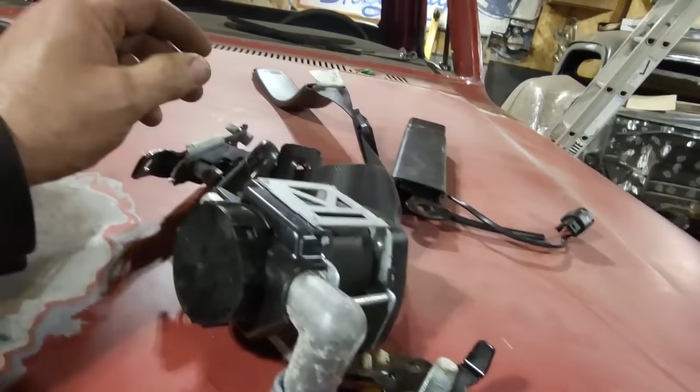The lower one here, I'm going to have to mount onto the A section of the door post, which is right here. These sections here originally belonged right here. I'm going to cut these out and weld them back into the truck, because then I've got the little slot and the bolt hole, which is the right thread, and that's what the seatbelt hung off of. It was only a lower bolt. And then this one here will bolt on in the factory location where it was, just right inside the door here.

The spot is down here on the floor. There's a spot there for the mounting hole. So there's got to be a bolt there and a bolt here that I'll cut the piece out of, and then there'll be another one put up here that I'm going to put a system there.

It's just these middle ones here, I know for a fact they're going to have to build something that them pieces are going to have to bolt to, that's going to be strong enough that it won't pull clear. So that's the reason why I wanted to put the seat back in it. I got to take it out again to put seat belts in it, but I needed to figure that out and get an idea of what I want to get done.

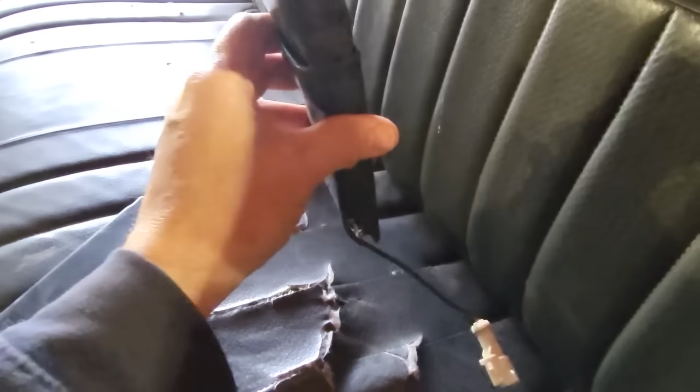So here's where I'm to. This is the seat belt that I got put in here. What I did is I had to remove the plastic piece off it. This is the way they look. The problem with it is the seat belt wants to sit like this, down and through the floor, and I want to have it so I can actually turn it this way, but it won't fit through the hole in the floor that way with this cover on it.

So I turned around now and I just got the cover taken off it. You can see it here. This is what's left to it now. I'm going to remove all them wires, and then I'm going to feed that down through there, and I want this to be about right there. About right there is where I want that. Somewhere around there. If I can get that to stay there now, it'll be something else. Just have that like that there, resting like that.

Now here's the problem you're going to run into. Now down here, you can look up there and you can see that tab hanging down. You can see where it's hanging down to that steel piece. That's what's got to bolt onto something. I want to build something there now that I can actually bolt that to. And you can see there's a cross member going across there. That's the actual seatbelt cross member.

There is an actual hole lower down here. You can see it there, just behind that plastic cover that the original seatbelt bolted to. But I don't think I'm going to go down that low. I'm trying to rig this up so I can actually still put the carpet in it, but I'm overthinking it more than anything else. I'll just trim it off around that piece. I'm going to weld something into the car that them seat belts will actually be mounted to.

I just want to have it nice and solid and up high, because if I go too low with a long piece of steel, the angle's not going to be right on it, right? So I'll take some quick measurements now on this here, get an idea where everything is to. I'll put the other one down there, get an idea how far apart they got to be. And what I'll do then is I'll start dreaming up some idea. I'll haul the seat back out and I can start installing all the seat belts. And there you have it.

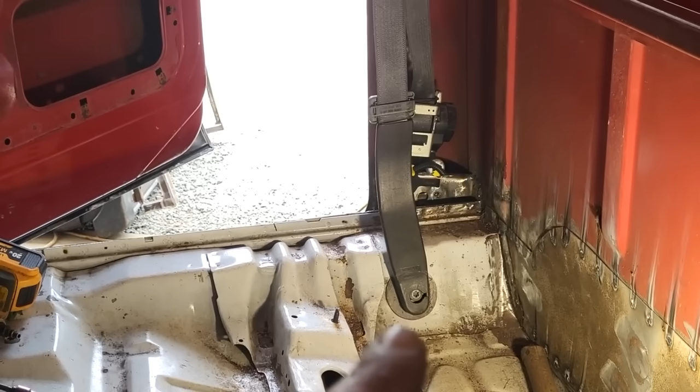One seat belt installed. As you can see down there, that's the factory location for that belt. That bolts right on here. Up here I cut a section out of the door post that this section bolted onto, and I kept it on the same angle that it was on, so that when I welded it in, the actual mechanism was leaned back a bit, because I think that if this was straight up and down, it'll have a tendency to lock more,

because there's only a pendulum inside them that basically makes everything lock up, and when they're tipped back a small bit, they got to go a little bit further in order for them to lock up. So I left it alone like it was. They're bolted on in all the factory holes from the Crown Vic.

Up here now, I used a section of the Crown Vic seatbelt mounting unit, and I put a plating system, a heavy plating system, in behind the actual door post, spot welded on with 8 spot welds, and this bolt thing is welded to this plating system.

Now what I'm going to do is walk you through this side and show you in detail everything I got done. But I want to get it done first, just to iron out and figure out what's got to be done.

Now up here, I'm thinking about how strong it is, plating this up and doing all kinds of stuff to it. For a human body to tear that clear, it's got to remove this entire quarter section right here. All that's got to be torn clear right out of it, because there's a big heavy plate behind that. And I think if you got to the point where you actually tore that clear, you wouldn't have to be worried about anything, because the G-forces to cause something like that would be crazy.

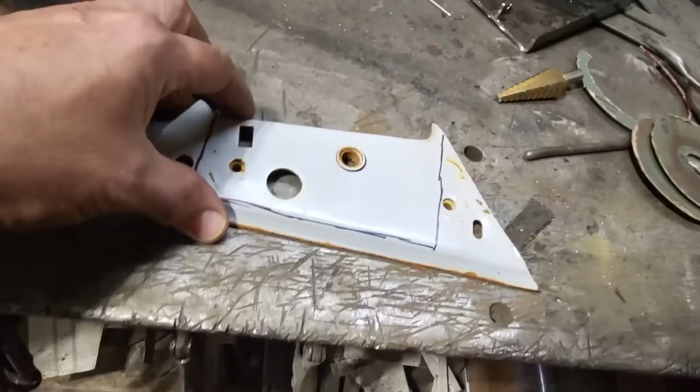Up here is where the upper section was too. There were 2 bolts in here that held this bar in that you could slide up and down. I'm eliminating all that. All I need off of this now is to chop this section out of here. I want to save this piece because I'm going to reuse it. So I got the piece cut out. Now I'm going to trim this off down along here, and trim this up here. So I got this all cleaned up and ready to install.

Over here now, this is the inner rocker setup on this truck, which is really heavy. I've got to trim this back because it interferes with everything. So I'm going to trim it back like I did the other side, cut it off here, come up here. I leave a section right here that I can plug weld to, and I can plug weld to it down here as well. You can see I've got it laid in place here. That's where that'll go. I'm going to measure the distance from here to here. It's 2 3/4, so I've got to make a piece to go up there, 2 3/4 of an inch, and then go out on a right angle.

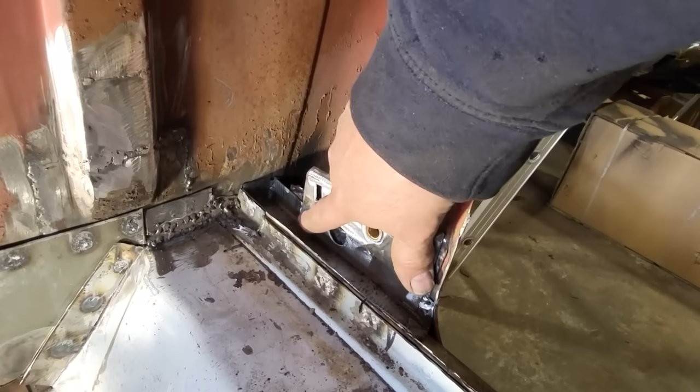All I'm going to do is weld some 14 gauge to this and extend it off. I know from here up is 2 3/4 where I've got to put a bend in it. So I'm over here now, and I just found a random piece, and I'm going to lay it up against that and weld it right along there. Make sure I've got enough there because it's not on a right angle. I'm not going to worry about trimming this up to get it perfect now. I'm just leaving a lot of excess on the top side so I can trim it all off after the fact. All I'm worried about now is making this longer with lots of excess off the end. This will do perfect. I'll get that welded on there now.

I got it welded on there, and you can see I marked off a straight edge, so I'm going to cut that off here. Down here I'm going to leave some excess because I want to roll over a lip the same as this here. I'll cut that off down along there, then figure out the distance from here down and put a 90 on it. That's all I did. Bent it up, trimmed it up, test fitted it a few times, then tacked up this top section, and welded all the back side of it to give it lots of strength, because I'm going to dress this off out here so it doesn't interfere with anything.

So I'll get that all dressed up. I'm going to drill a couple of spot welds in it right here, and one's in here. And possibly I might put one down in here somewhere. And that there piece is pretty well ready to be put in.

So I got the piece all done. Plug welds put in it. Dressed up. Welded on the back side. Cleaned it up. That will go in here now just like so. That'll fit in there. And I'll plug weld the plug welds.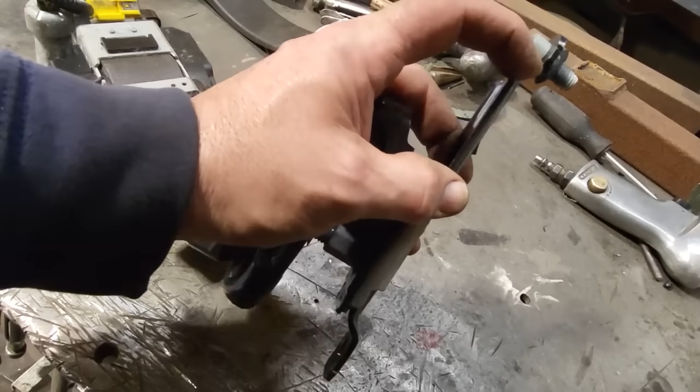This is what the upper shoulder harness was mounted to. If you look at it here, it was 2 bolts holding this in place. And there's just a little tab up here, basically as all it was, that was holding this whole mechanism in the thing, and 2 bolts. So like, it's not a big heavy duty item. And this slid up and down on top of this bracket here.

Now I'm going to eliminate all this. I want to keep this piece right here because that's what the bolt goes into. And I want to get rid of all this. All I'm going to do is cut this in half here, slide this off it, and this plastic stuff only snaps on. I'm going to remove all the plastic stuff off it.

So this is the unit that was mounted on the doorpost that everything was mounted to. This is what the seatbelt was mounted to, and then this slid up and down. I'm going to eliminate that. I was thinking about using it, but I don't need that. But I do need this mounting point. So I got to remove all these pieces off it.

In order to get this off the track, I got to cut the track off. So I cut it off, and just slid the unit off it there, and just popped it off. It was only snapped in place right there. And then on the inside of it, there was like a Teflon liner that went in it that slid over this here. So I pulled that out of it. So I need this. I don't need that.

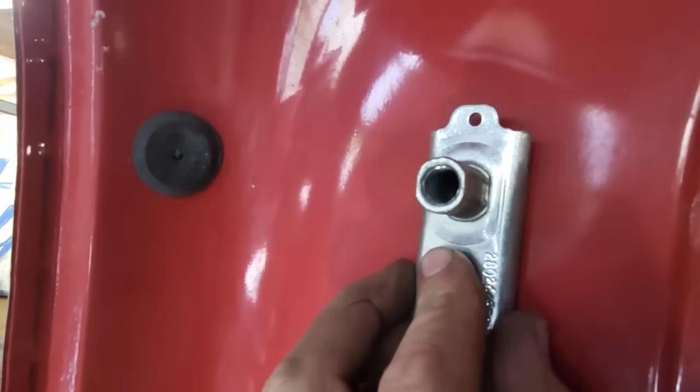So now this is the next thing. Now I got to figure out how I'm going to mount this. Now right here, I got a mark put. And that's where I want the seatbelt to go, because I compared to the other side that I got done. This has to go on the inside there, in behind it, and it's got to be mounted to something to give it lots of strength on the back side.

What I found was this piece of steel. This was a rack off a pickup truck for a box, I think it was, or a rack of some sort, like where you mount the stuff on it. And it's pretty heavy gauge stuff, right?

So what I'm going to do is I'm going to find the center of this here, drill a hole down through it, and that's all I did on the other piece. I drilled it. I had 2 of these. I already have one installed, and then I'm going to drill this so this here will go through the hole of this here on the back side of it. So I'll get a hole drilled in this first.

So I got the hole drilled in that, and I stripped all the outside of it off, and I sanded the inside of it here. And the reason for that is because I need to take this now, drop it down through here, like so, and that'll stick out like that, and I'll weld this on the back side.

Now, when I put this up in place, I got to find a way that I can put it up and get it mounted in place and bring it in tight. This is what I come up with. I got a 3/4 socket. Now, this is one of the seatbelt bolts that went into the car, and the bolt is the same thread as this here.

So, all I did is you take the 3/4 socket, and that fits into there like so. So, that'll fit over that, and that'll tighten up into that. So, I'll just put that on there, screw that in there. And that'll tighten up there. Now I'll straighten this up.

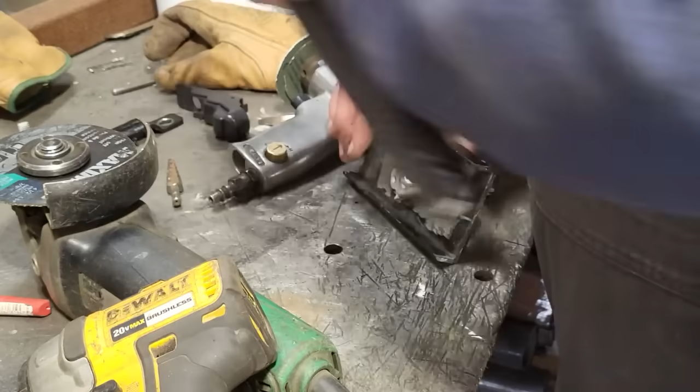Like so. Now what I'll do is I'll go over and I'll weld this in here, and I'll weld this in here. This is spaced off a bit because this is raised up in this area here, but I only want to hold it stationary so it doesn't turn, and I'll use this mechanism to do it. So I'll get this welded up here now. So I got that all welded in there. I just welded both ends of it there. That's permanently part of that now.

What I did then is I come over inside the truck, and the spot that I had marked, I drilled it out, made it big enough. Then I took this here and laid it on over, got the spot where I liked it, because you can turn this certain ways, and it don't want to go in perfectly straight. It wants to sit flat this way here. So I marked it around with a marker, and then I drilled out all these plug welds. Now I can feed this up through. And that's as easy as that.

Now I forgot to clean the tops off of these here. I'm going to strike these with the grinder now, clean these up. And I'm going to go ahead now and get them all welded up. And there they are, all welded up. I get that all grinded up now and call this one done. Got it all back in place.

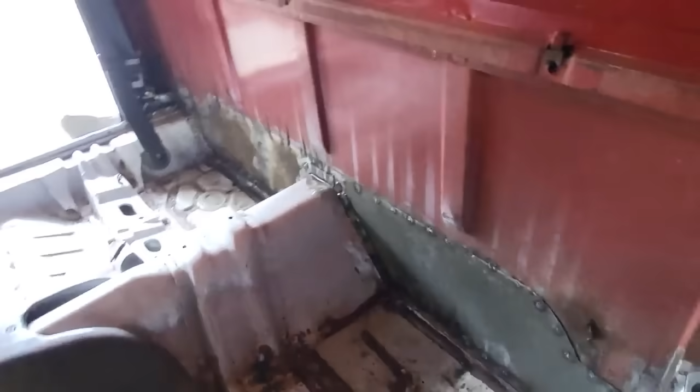There's little covers I got for that to go on that. Down here, you can see where it fits on. The original tab goes in the hole and it tightens up. And then it goes into the original mount on the bottom. That's that done. Now I gotta move on to the center here. I gotta make up a brace that'll go across here that I can bolt the seat belts to.

First things first, I'm gonna give this a clean up. Give it a blow out. Now, I'm not gonna overcomplicate this. This is underneath the seat. I got a cross member on the seat that's about right here. That goes across, and it's up off the back of that there about that much. And the seat belt mount goes here, and it says about 14 inches got to be between the two holes for the actual bolts to go into them.

And these are the mounts that I'm going to take in here, these ones here. These are the original seat mounts. The inside seat belts used to be mounted on these here, and the seat was mounted there as well. So all I'm going to do is just make it out of angle iron. I got a bunch of this stuff over there.

I'm going to flange it on the bottom, square it up and weld it up so there's two sides on it with a bottom, and then that'll bolt on there with a hole in it, and that'll come up on an angle possibly to this here, and it'll be welded across this here on two angles. And then I'll just drill a hole in this here, and I'll probably trim this up here so it fits down inside that cavity a bit better, right?

It don't have to go down flush because I got carpet and everything goes in it, and I just need to get it as low as I possibly can get it. So I'm not going to overthink this. I'm just going to go over there now and start cutting up some steel and making up some pieces.

So here's what I come up with. I went and had these 3/16 washers. They had the back side cut off. I don't know what they were for; there was something belonging to this car. And I just took angle iron and brought it up on an angle. I didn't want it straight up and down, and brought two of them on an angle so they came towards each other, so they were fighting against each other. And then I just placed an angle iron across the top of it.

I got the seat in it, I'm telling you, holy bless it. Talk about spot on. There it is in there. And the angle iron is just touching the springs for the seat. Just touching them. Now, when I take a ½ inch off the top of that, I don't need it all there, it'll be perfect. So I'm not going to change a thing on it. I'm just going to take it out, weld it up now, and make sure that it's still going to fit in there after I weld it, because it's going to shrink up. And then I'll just trim it all up and make it look nice.

There it is. I got it all cleaned up. I trimmed off a ½ inch or more off the top side of it there. I have these temporary bolts in it here now. I dug out some old header bolts and 9/16 bolts to bolt this together. For some reason, it comes with two different seat belts in the front of these, and I'm going to go out to the other Crown Vic and haul the front seat belts out of it and get a matching set. But for now, I'm just going to bolt this in the car like it is, check it out, put the seat in it and try out the seat belts.

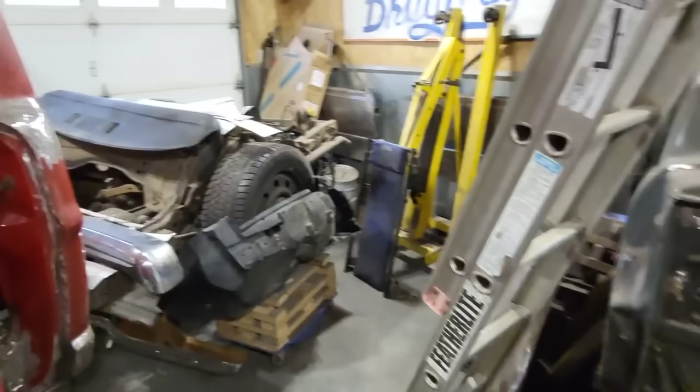Everything was going good till it wasn't. The seatbelt mount unit works. It will be fine. I can use it. The problem with it is now, after sizing things up, the seat frame goes across here, and the actual bracket is ahead of the seat frame, but up inside the seat, so you can't move the seat forward. I'm not getting into changing it right now because I don't really need the seat to go ahead for me right now. I'm more concerned about getting seat belts in it.

And this seat belt here won't fit, this one here with this block. I don't know what it is. There's wires coming out of that. There's sensors for something, right? Everything is a sensor. And then there was wires coming out of the top of this. You can see the wire there, and you can see the wires coming out there. Man, oh man, it's way too much. That was the length I'd like to have, but without that little square block. I'd like to have that with the strap. The belts are not long enough, these little pieces here. And I don't know what other Fords got that style in it. Maybe I get something out of a truck that'll be the same.

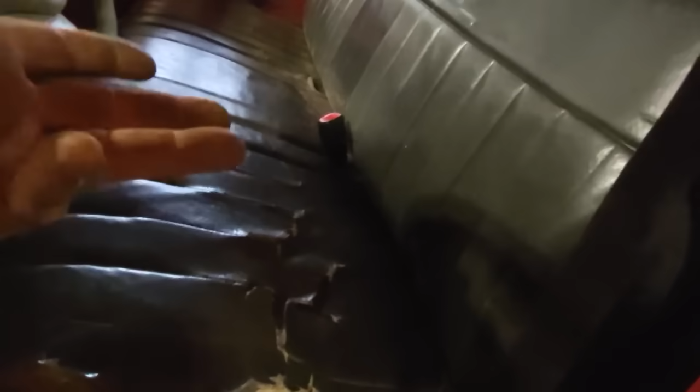The problem I'm running into is that I can't bolt them onto the frame and then put the seat in and pull them up through. They won't go. There's no room there. The seat won't lay down. These have got to be where they are right there. And if they're down under the seat, the seat won't fit in place. It's a bit of trouble here. I had to jack up one side of the seat and then reach in underneath with a nut and a bolt. I just got a little nut and bolt finger tight on it there now. Sat up in it, tried it, everything's fine.

But there's like a seat frame that goes around the back of the seat and the seat won't move forward. Now, I'm not too concerned about it. I've come this far with everything here now, and I'm thinking about ways of fixing it. And the problem you got is that right off the bat, even if the seat did move, they'd be no good. Because once the seat goes forward, that'll pull down to the floor. That's fully tight there now.

I got up and sat in and put the seatbelt down. Feels best kind. I just got to go out in the other cop car and take this other seatbelt out of it. And I got to figure an easy way to bolt it on. Like, I should weld another something on one side, but I got to figure out a way to do it. And these are not long enough.

Like, if they were another 3 inches longer, you can drop them down through the seat and lift the seat up. But the problem you got is when you go to lift the seat up to get at the bolt, that pulls down through and falls down. So it's one thing, half dozen another. But I'll get around it. I'm going to call that a win anyway because I just got to change the seat belts. It's just a lot of work to put the seat belts in.

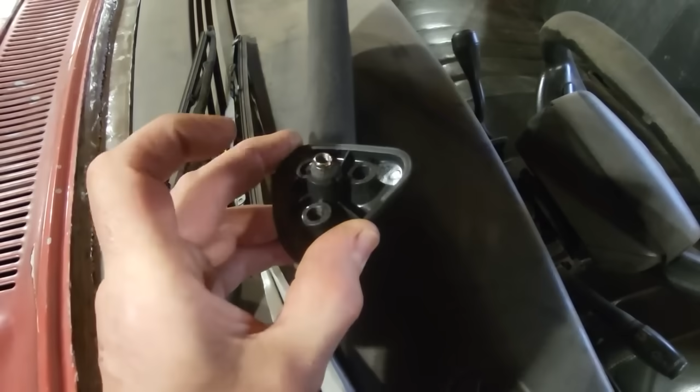And I went out and I took one off the parts car. It's tricky to put it in place. I can make it work. It's just going to be stuck off a bit when you mount it in the vehicle. The way the roof is, this here is going to be stuck off a small bit. These two screws will be holding it in place, and this one here will be sticking up a small bit. It's no big deal. I can live with that. But it's so much easier to get in and out of this now.

The problem I got is I got to fill this up along here. And if I drill all the holes for this now and I fill it, I'm going to have to be dealing with trying to clean out all the holes. We're talking about 3, 4, 5 holes on either side. And I said, Tony, just fill it all, and then before you prime it, drill it out then. So that's what I'm going to do. I'm going to put them off until after the bodywork is done, so I'm not going to include them on the list.

So I basically have everything done that I need to get done on the truck. Everything else seems to be copacetic. I'm thinking about straightening up the garage here next week. I'm going to bring the box in so I can work on it, but I want to concentrate on getting the body work done on this and getting everything primed, so that way I can start putting this back together.

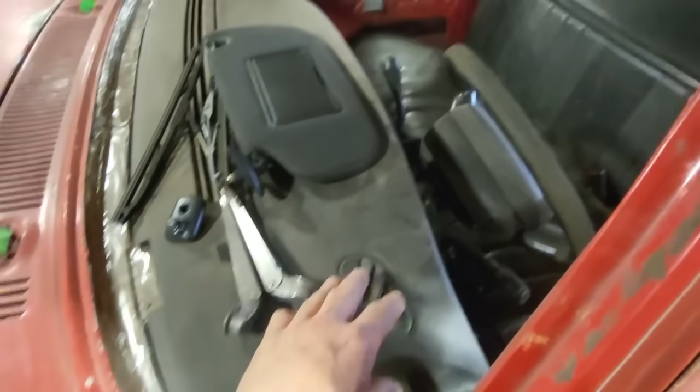Because the biggest thing is I want to put the dash in it permanently, but in order to do that, I got to fill and paint all this here. I'm only going to do it with spray bomb, satin black. I'm not going to do nothing else. I eventually want to make covers for this, but not going to bother with that this year. I'm just going to get this all filled, get it all primed, same with up on top there, so that way I haven't got to worry about it no more.

And then the outside of the vehicle, I'm going to be sanding everything out, feather edging everything back, doing a bit of body work on stuff, buzzing it off. That's it. I'm not getting carried away with body work on this. Right back here on the back of the cab, I'll do a bit of body work on the sides, but all this here is going to be seam sealed. It's behind the box, and there's an actual seam there anyway, so I'll just be seam sealing that up.

So you could say the fabrication work on the cab, the front of the truck, is complete. I do have one thing I never installed, and that was the battery box. I got to modify that to fit over there in that corner, but it's only made of plastic. There's no welding involved, I don't think. I may have to make a stand to mount it in there, but I can do that later. It's not going to hold me up. I wanted to get the fabrication work done inside the cab, the welding, the visors, anything touching the body.

But yes, there you have it. In all her glory, she's laid on the ground there now. There's still no motor or transmission in, so this thing is going to be low. Anyway, this is where we're going to leave this one.